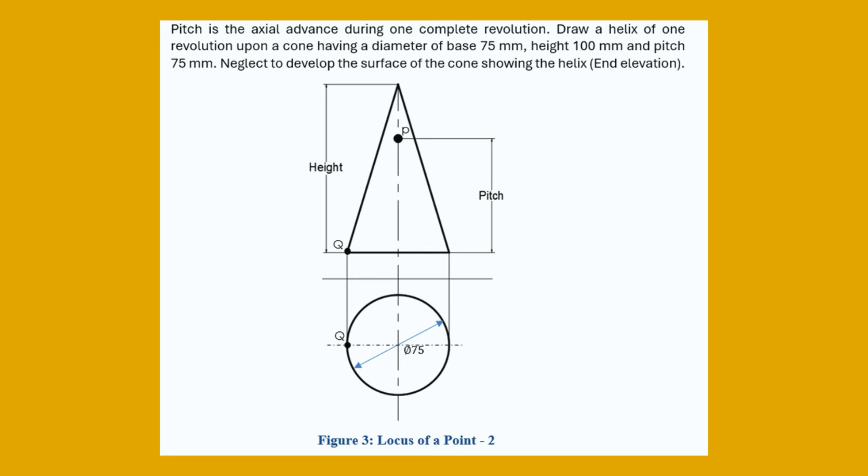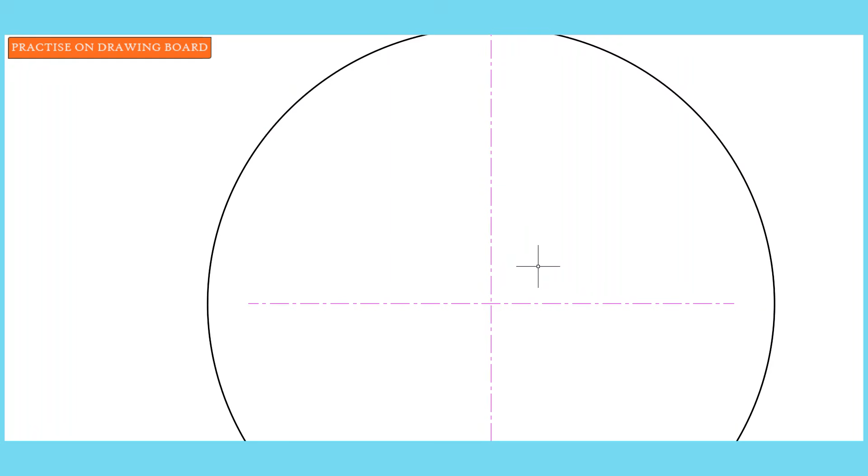Okay, so straight away we can draw this center line. And then we can draw the base of the cone. This is basically helping us to locate the center of the circle, which would be the base of the cone. So diameter was 75, so radius is 37.5. So with your compass, you can measure and draw that in.

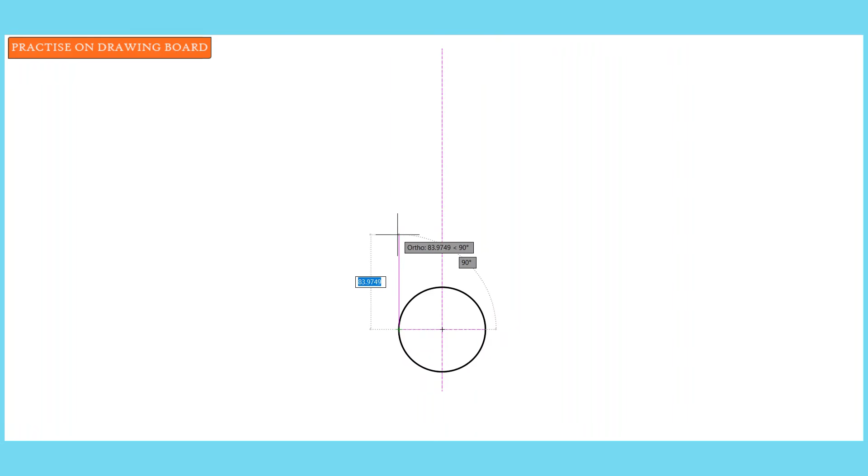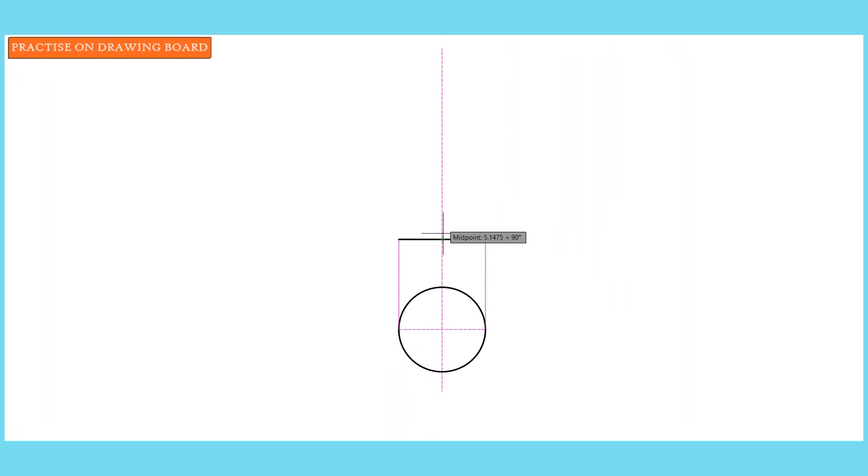Then we can throw these projectors upwards onto the front elevation. Now that basically would be the flat part of the front view or the front elevation. Then we can measure 100 from the base. That will give us the apex.

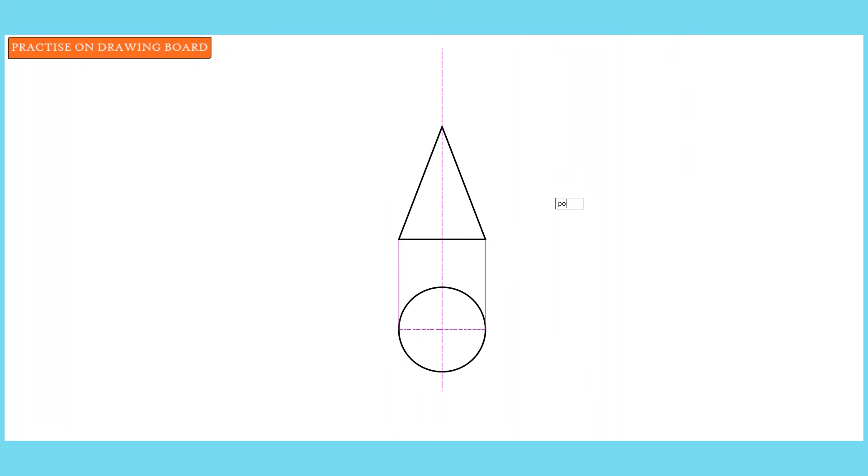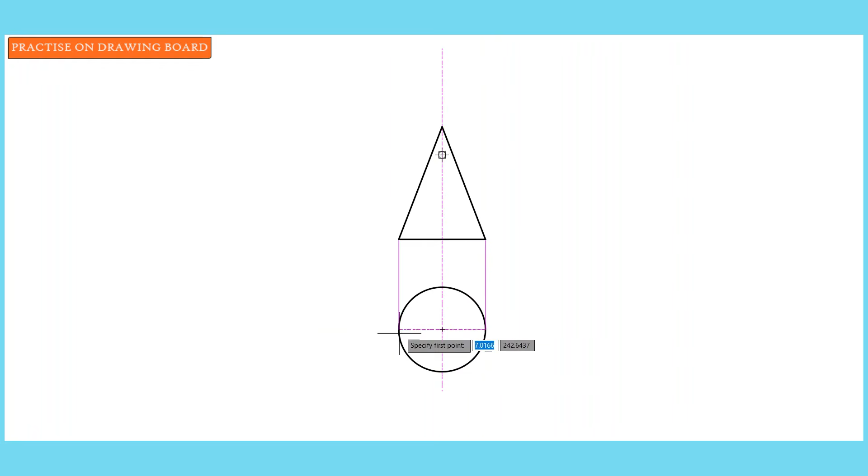Now we want to locate P, which is the pitch, and we measured 75 from the base of the triangle.

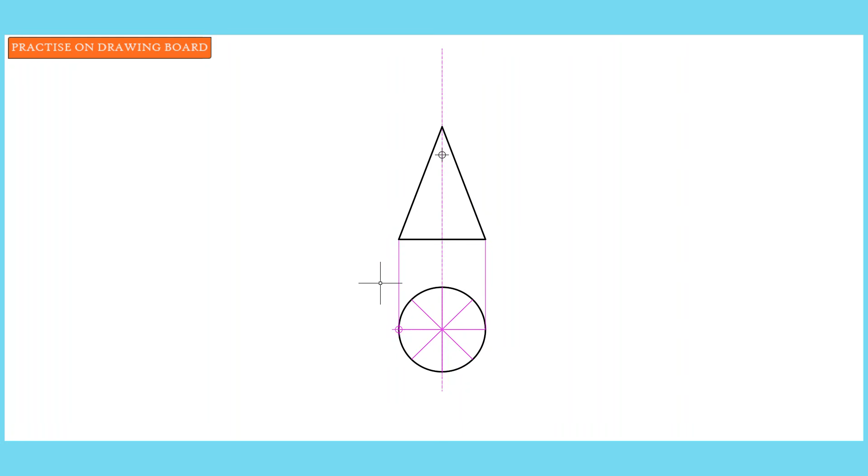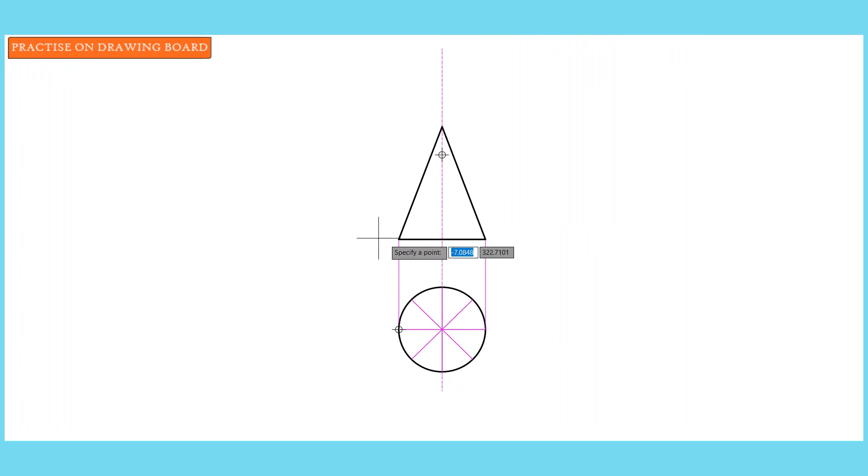Now we will divide the base into 8 equal parts. So you either use your set square, 45 degree set square, or you may use your protractor and use the circle division method. That's also fine. And then that's point Q and point Q. So we can label this. Note we are labeling in the clockwise manner.

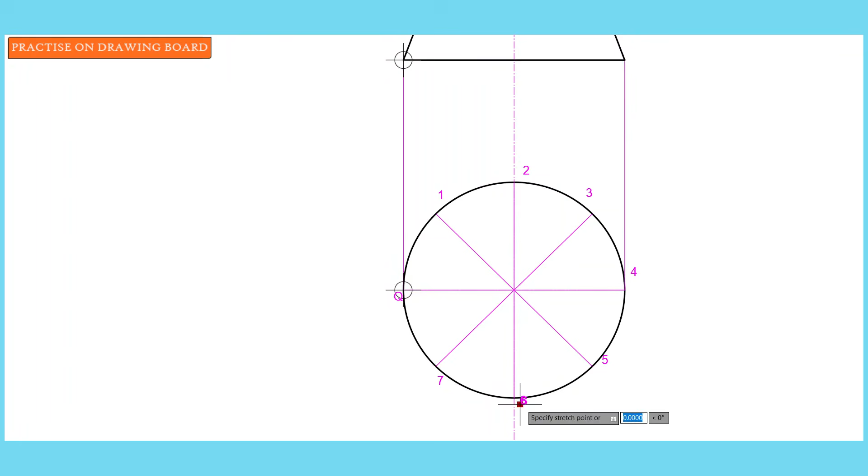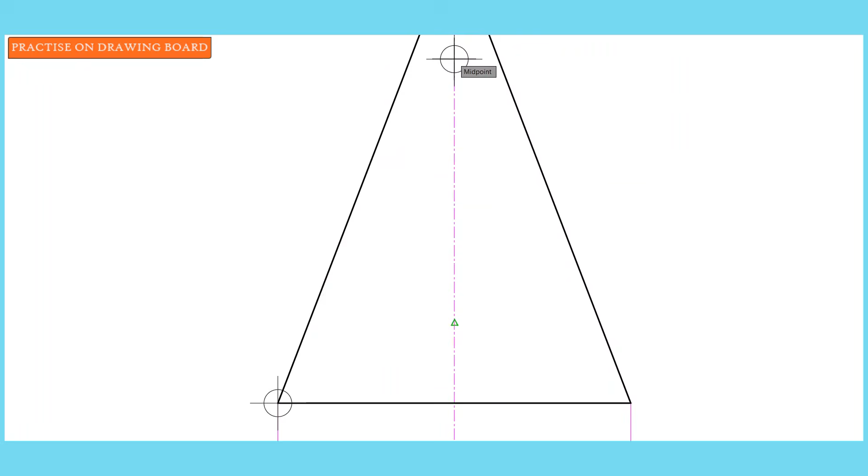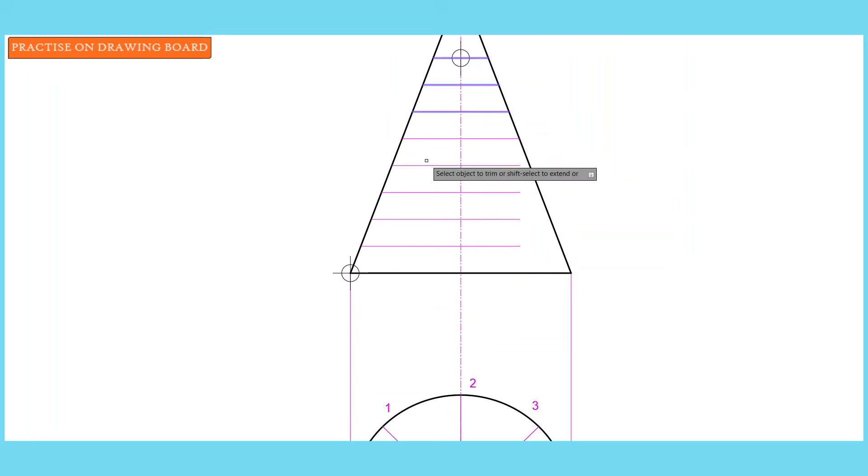Now we'll divide the pitch, which is 75, by 8. And then we'll divide the pitch distance into 8 equal parts. And label them. So from Q to 1, 2, 3, 4, 5, 6, 7, and 8.

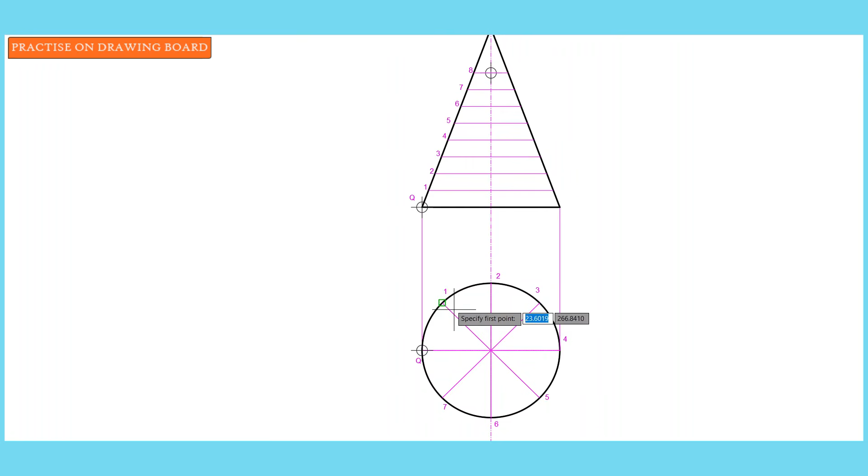Now we can project verticals from the plan to the front view. So 7 through 1, then we connect to the apex. Then 3 through 5 we connect to the apex, and then to get the helix on the front view.

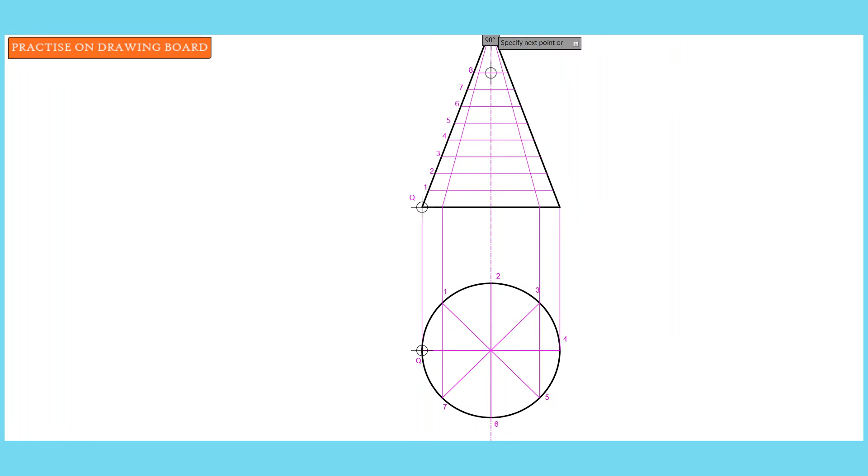The intersection of vertical line 1 and horizontal line 1 will be P1, vertical line 2 and horizontal line 2 is P2, and so on and so forth until we get to point 8. So you label the points. You realize I haven't labeled them in this exercise, but you label the points from P1 to P8.

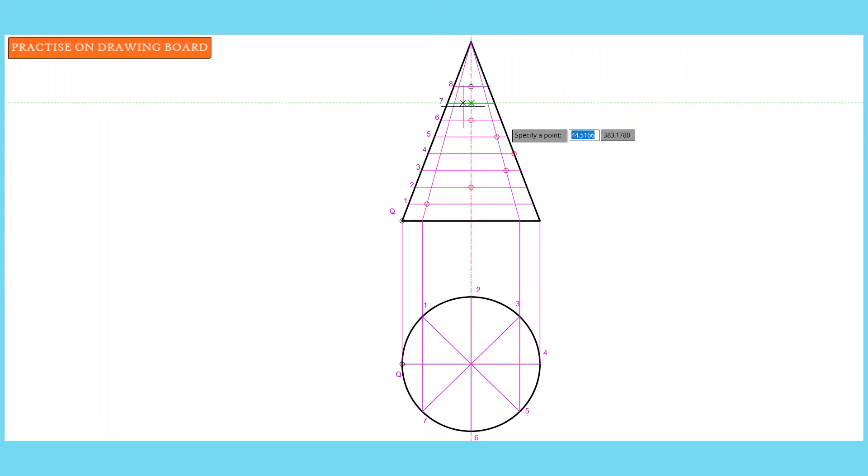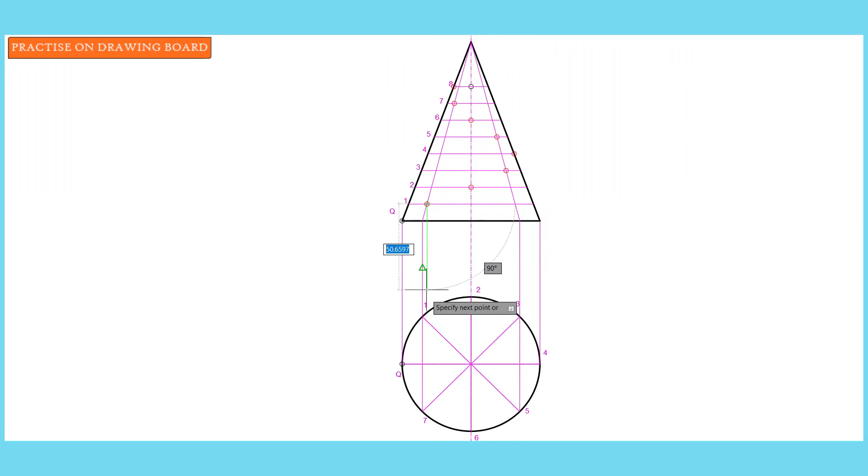Now we want the plan view of the helix on the front view. So we draw vertical lines downwards. So from point 1, we draw a line until it intersects with the 1,5 divisional line, and that is the point 1 on the base.

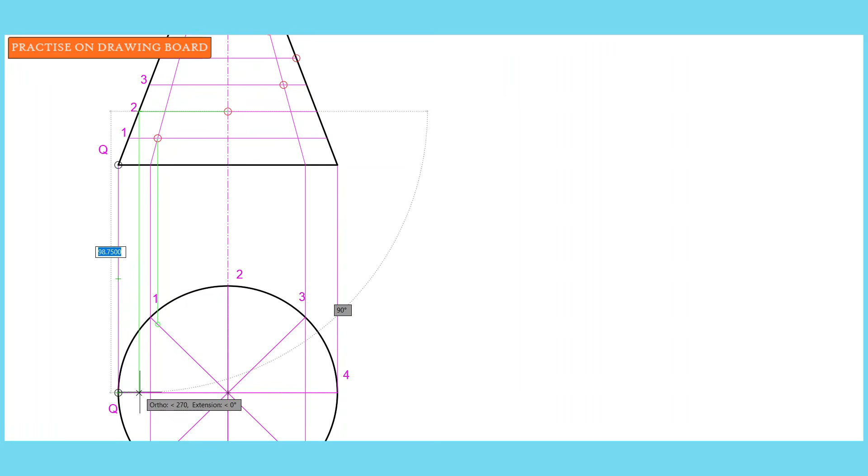For point 2, we will project it to the directrix or to the side and then draw it downwards to the diameter or to the diametral line like that. And then using your compass, you stand at the center of the circle and open to where the vertical line from 2 got to, and project or draw an arc to the 2 line, and that will be how we get point 2.

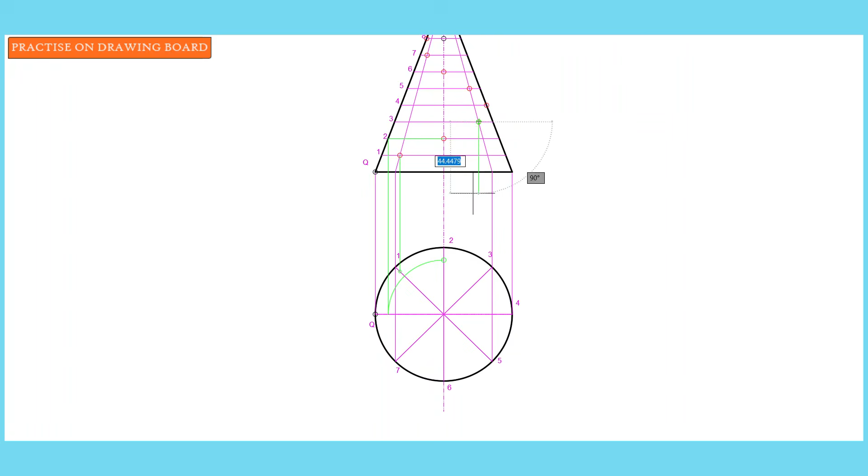So for point 3, we just project it downwards to the 3 divisional line on the plan. Point 4, we project it to the 4 divisional line on the plan. So goes for point 5.

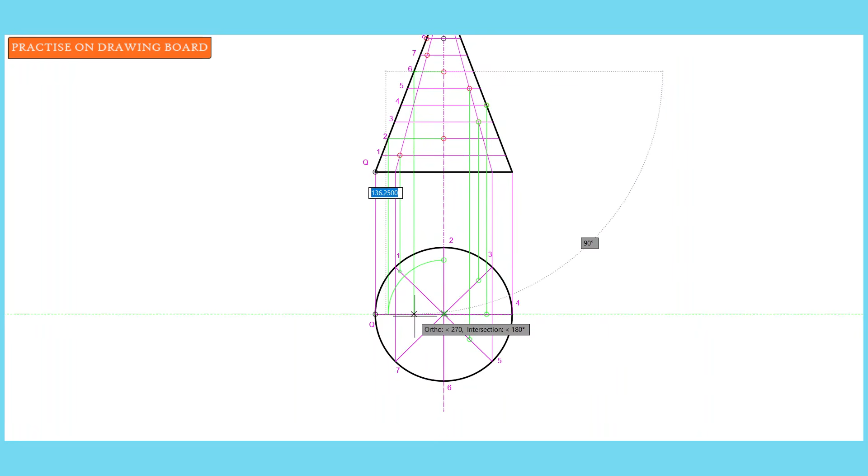Then for point 6, we have to use the same technique we use at point 2. So connect to your generator, then down to the diametral line, compass at the center of the circle, open to the intersection, and then draw an arc on the 6th line. So you stand at the center, open to that point, then draw an arc to intersect with the 6th line.

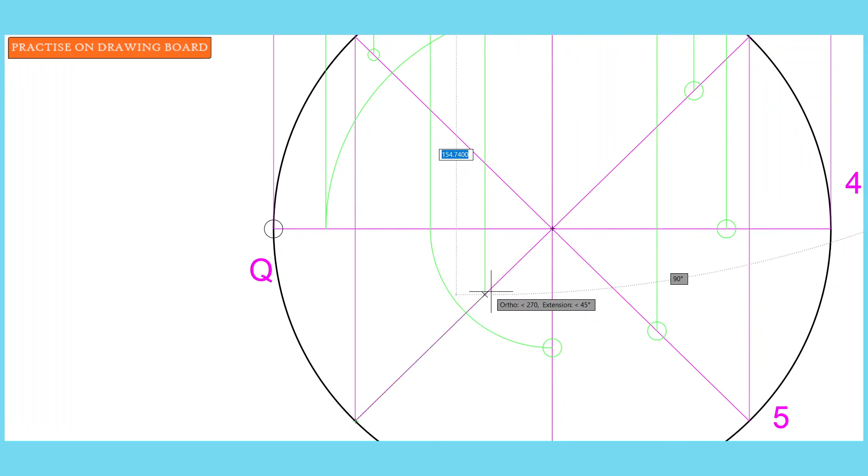That is point 6. Then point 7 is a simple vertical to the 7 divisional line. And then point 8 is also a simple divisional line, a simple vertical line from point 8 on the front view.

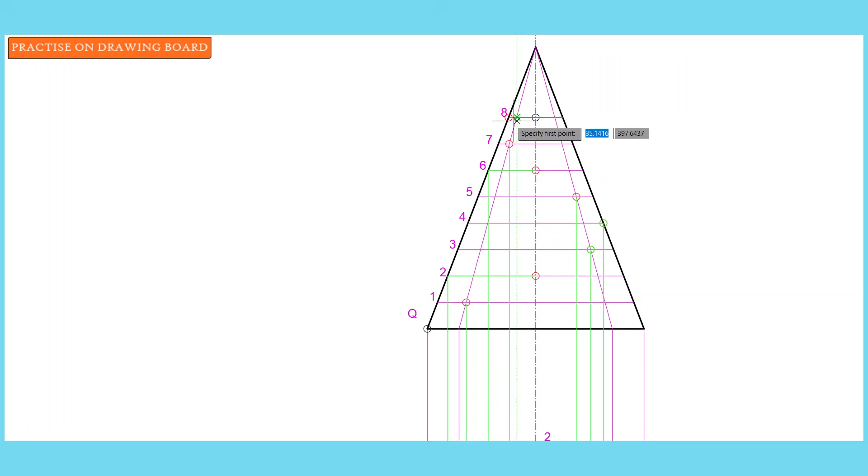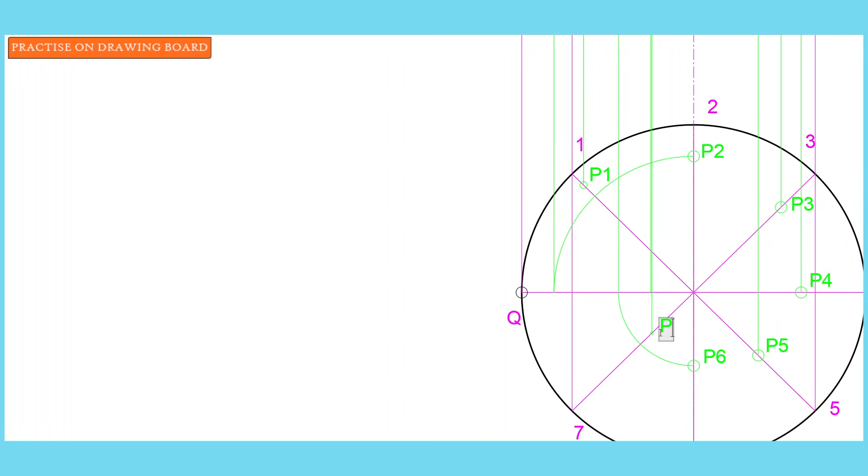So we label the points P1, P2, P3, P4, all the way to P8. And then, now with the help of our French curves, we can draw

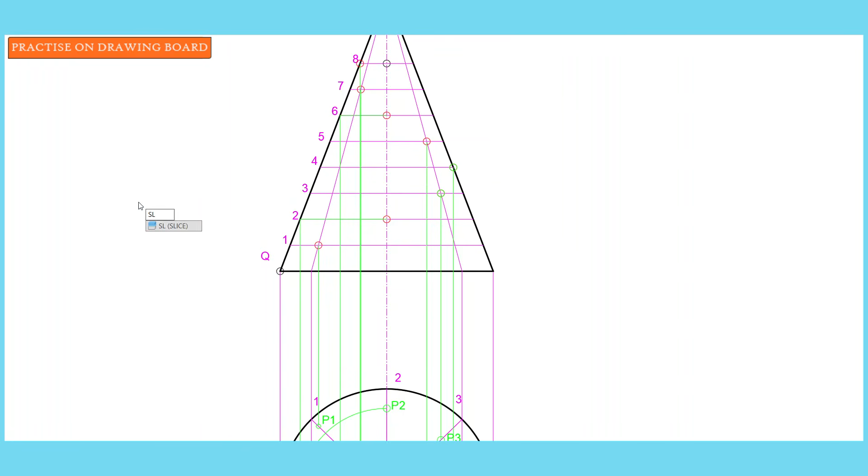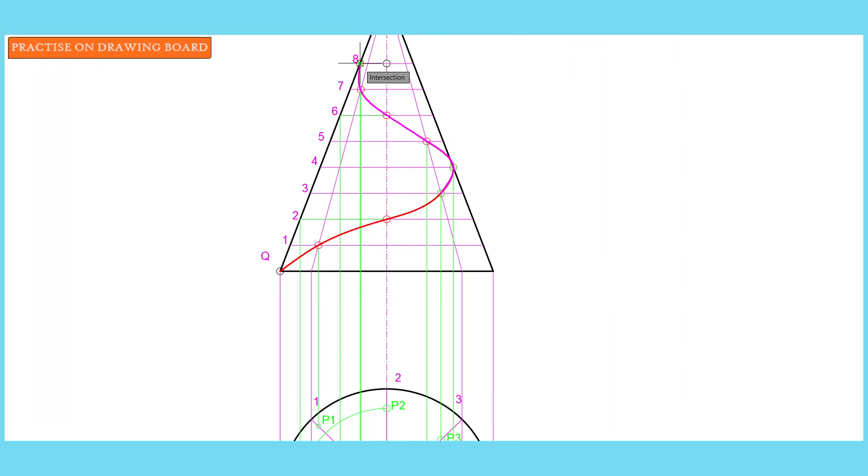The helix. Let's begin with the front view. So from Q to P1, P2, P3, and P4. Now mind you, from P4 to P5, P6, P7, and P8, that should be represented with a hidden line, because that's a hidden detail from the front view of the helix. So you see I have those dashed lines.

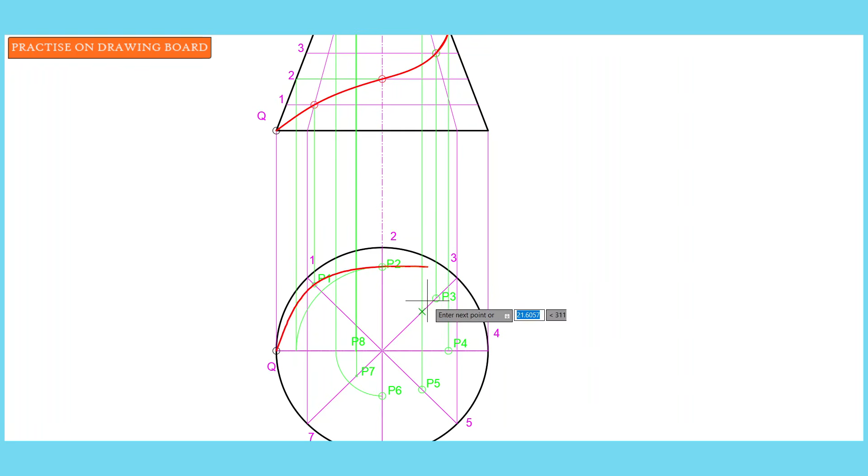And then same French curve, we draw the projection of the helix on the top view, or on the plan.